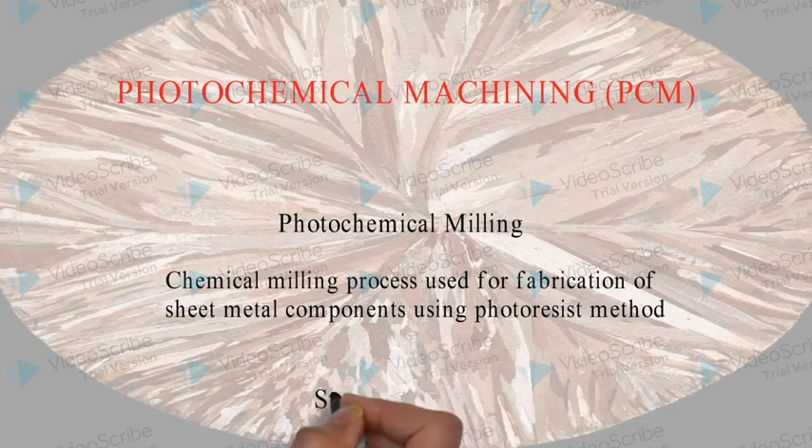Hello, in this video we are going to learn about photochemical machining, in short PCM. This process is also known as photochemical milling and can be thought of as a chemical milling process used for fabrication of sheet metal components using the photoresist method. This is a stepwise process in which each step has some significance.

The first step can be considered as metal preparation. This procedure is usually used on sheet metals, so the first step is cutting them into a required shape. Then the sheet metal is extensively cleaned for increasing the adhesive properties of the surface, as we are going to apply a photoresist coating on it. For cleaning, the reagents used are mild soap, acids or alkalis.

The second step is photo tool production. Photo tool can also be called a mask. In this, the printing of the desired shape pattern on a thin polymer sheet is involved. The designing pattern or drawing is done using CAD software, and this drawing is also considered for etch allowance and compensation during machining. The third step is photoresist lamination, in which the photoresist is coated on both sides of the sheet metal.

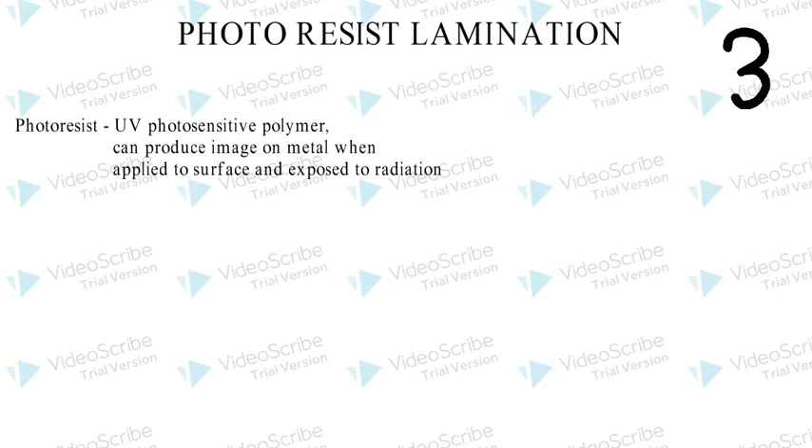So what are photoresists? They are ultraviolet or light sensitive polymers which can produce an image on the metal surface when applied as a coat and exposed to radiation. There are two types of photoresist material: positive working photoresist, in which the dark part of the photo tool is the surface to be machined, and negative working photoresist, in which the dark part of the photo tool is the surface which is to be protected from the etching.

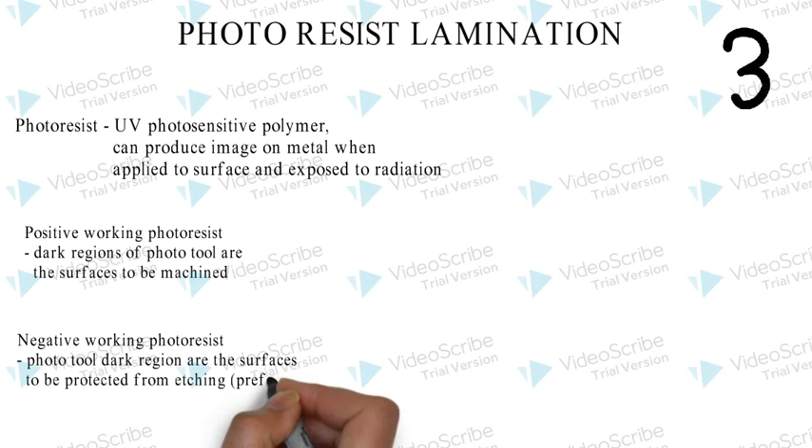To better understand this, here is the image when we need flower petals as our final output and we are using positive working photoresist. And this will be the image or photo tool when we are working with negative photoresist and we still need the flower petals as our output part. So in the third step, the sheet metal is coated by the photoresist on both sides as shown.

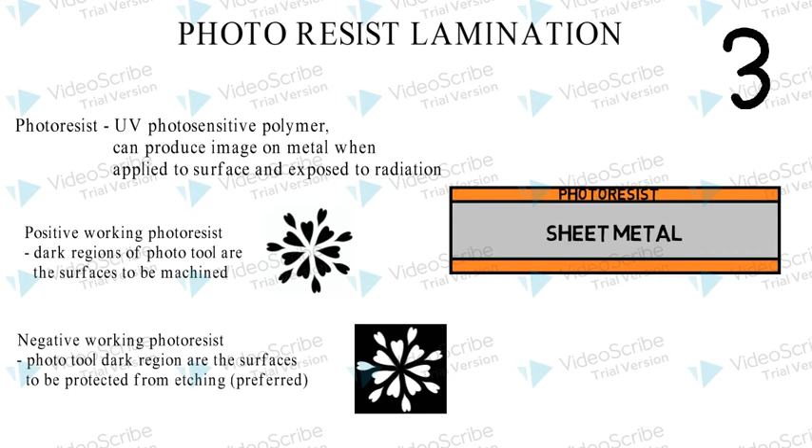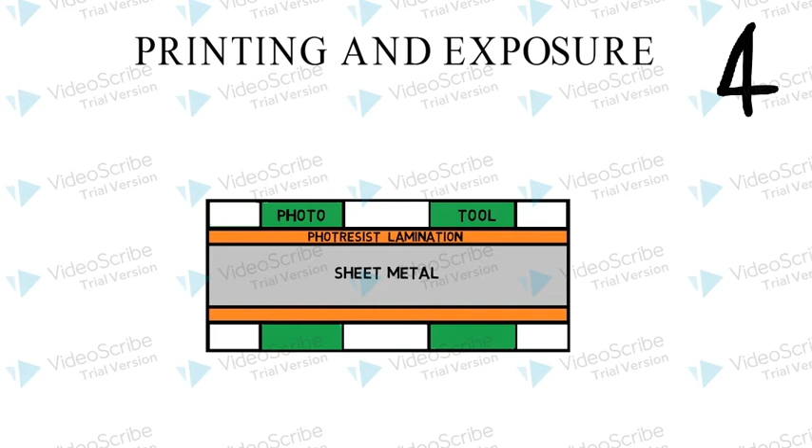The fourth step includes printing and exposure. The photo tool or mask is aligned with the sheet metal we already have with laminated photoresist on both sides. This alignment of the photo tool is carefully done using robotic handling systems. This whole arrangement is then exposed to radiation.

Different types of exposure methods exist depending upon the distance between the photo tool and the photoresist lamination layer. Mostly during exposure, the part of the photoresist exposed to radiation is hardened and the part which is below the mask or photo tool remains soft.

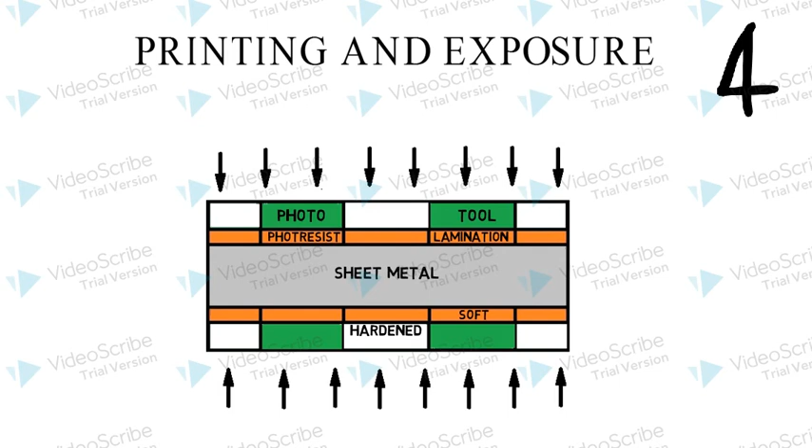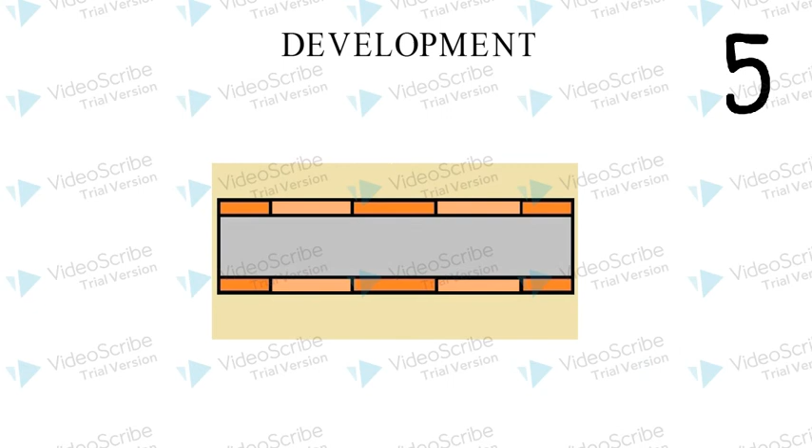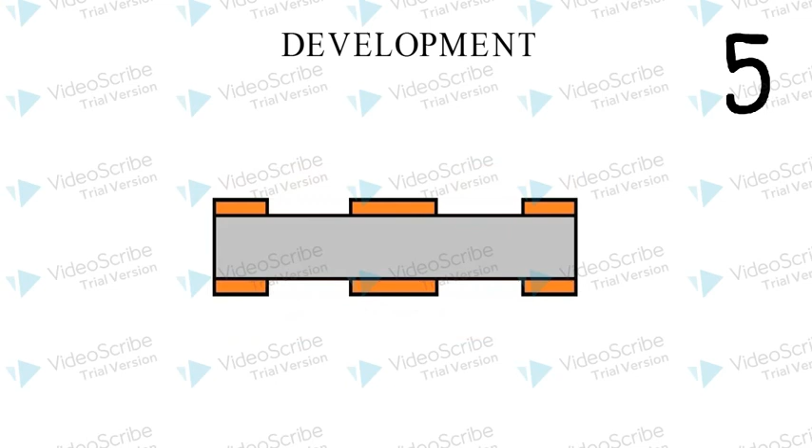This leads us to the fifth step, which is development. The sheet metal with the preferentially hardened photoresist layer is then immersed in a mild alkaline solution. This solution dissolves the softer part of the photoresist layer and the hardened part remains as it is. After developing, the workpiece is subjected to etching.

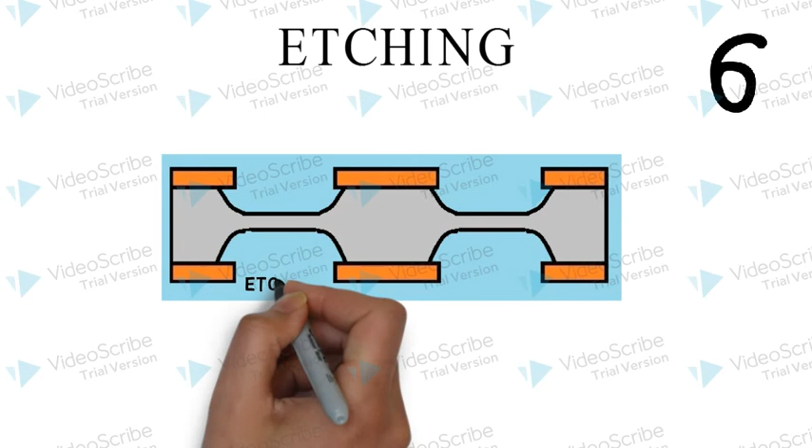It is immersed in etchant, or maybe the etchant is sprayed on the workpiece. As shown, etchant dissolves the exposed part of the metal. The reduction in dimension of the workpiece is controlled using the control parameter of reaction time. The larger the reaction time, the more will be the dissolution of the exposed part. This can be considered as the final output of this etching procedure.

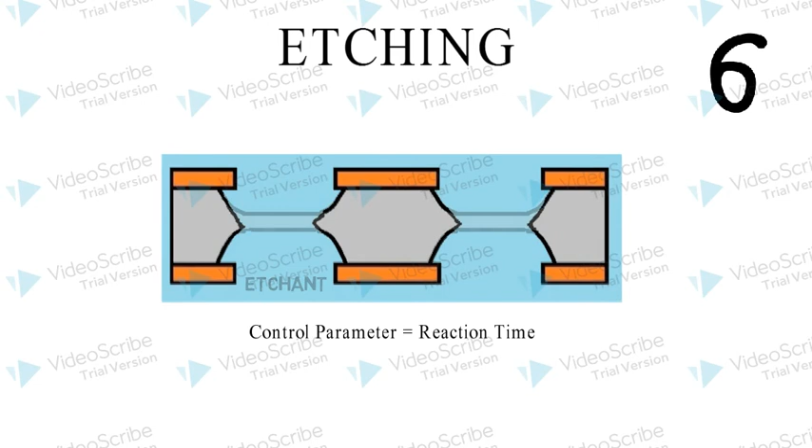Different etchants are used for different materials in the workpiece. For example, aluminium uses 20% hydrochloric acid solution, whereas zinc uses 10% nitric acid solution.

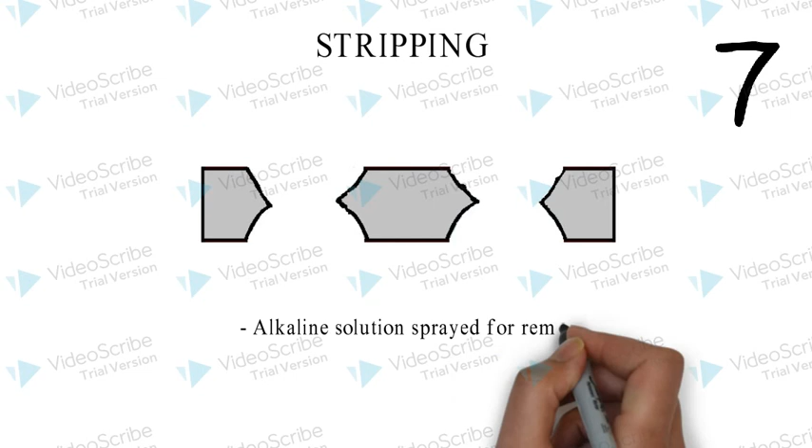The seventh and last step involves removal of the photoresist layer remaining on the workpiece. This is known as stripping. Stripping is done by spraying alkaline solution on the workpiece material, and the equipment is known as a stripping machine. This leaves behind the desired workpiece in the desired shape and pattern.

Photochemical machining has many advantages. Firstly, it is quick and it is quite inexpensive. Also, there is no physical application of a tool on the workpiece, so there will be no wear. Fragile and complicated shapes can easily be machined using photochemical machining.

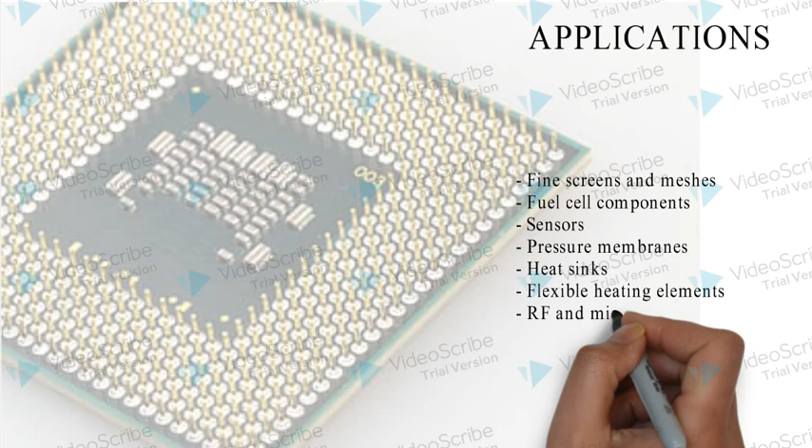This process has numerous applications in different industries. Some of them are listed here: fine screens and meshes, fuel cell components, sensors, pressure membranes, heat sinks, flexible heating elements, microwave circuit parts, semiconductor lead frames, motor transformer lamination, metal gaskets, electrical contacts, and encoders. These are mostly semiconductor industry components.

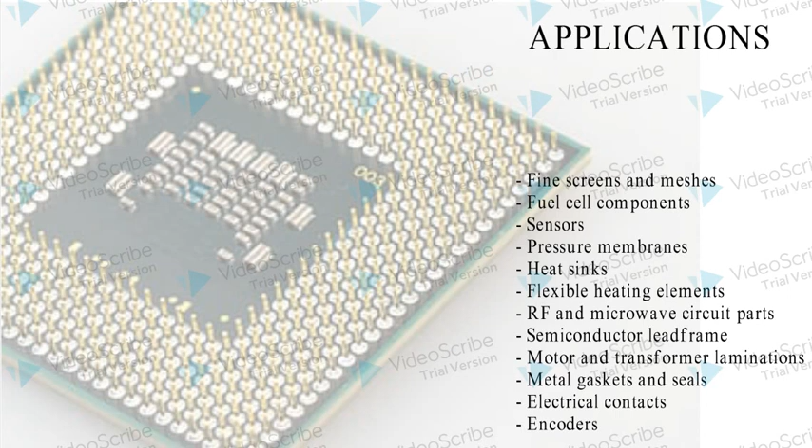Photochemical machining is preferred in the manufacturing of semiconductor materials and sheets. It can be regarded as quite a useful manufacturing process for these materials. So this wraps up photochemical machining.